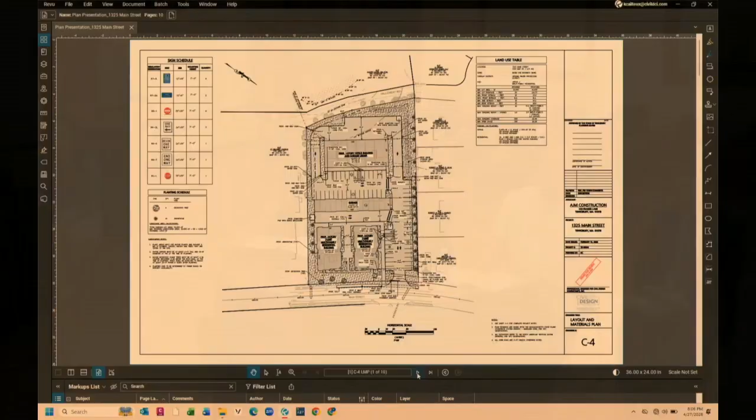With that, the floor is yours. Great, thank you. So we're here for a special permit and site plan review for the proposed redevelopment project located at 1325 Main Street. We initially opened the hearing on March 9th, where we presented the project, which includes 2 multifamily buildings, 7 units each for a total of 14 units, along with a commercial building located at the rear of the site. Since then, we've continued the past 2 meetings to address comments from the town staff as well as the peer reviewer TEC.

In that time, we also received a zoning interpretation from the building commissioner, confirming that this project qualifies as a mixed-use development and only needs to comply with the mixed-use business zoning regulations. So Section 8.2, which is the multifamily development requirements, does not apply to this project.

The applicant has chosen to retain certain elements that would have otherwise been required under Section 8.2, including the detached garage for the residential use and the additional parking. For context, Section 8.2 required 35 parking spaces, and we've provided 37. Under the MUB requirements, only 24 parking spaces are required for the residential use, but we've maintained those 37 spaces, so the plan exceeds that by 13 spaces.

Two weeks ago we submitted the revised plans and supporting materials addressing all the review letters. We then received TEC's second peer review letter this past Thursday. At this point there's a handful of remaining comments, all relatively minor, primarily related to additional drainage calculations and a few additional construction detail clarifications.

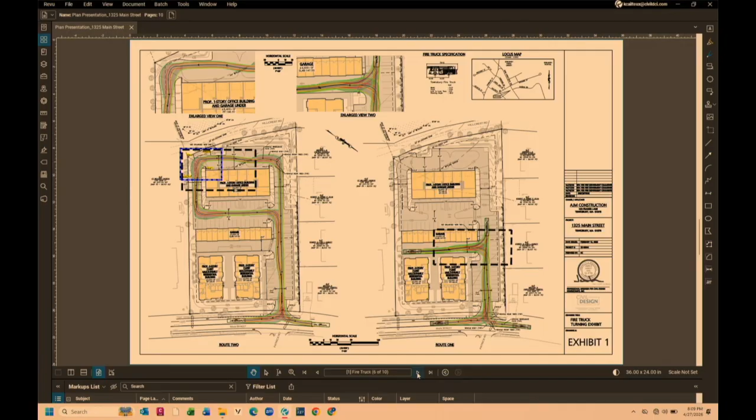Going back to TEC's second review letter, there were 4 comments, items 3, 7, 45, and 59, that were deferred to the board. I wanted to know whether the board reviewed those comments, and if you'd like us to speak to any of them. If you want to, it's up to you.

And then lastly, we included a waiver request letter as part of the revised submittal, which includes 3 waivers. I'm happy to also walk through those waivers if you'd like. Yeah, why don't you walk through the waivers just so everybody knows what they are. Sure.

Waiver number 1 is 6.1.10.b, the driveway separation from a street intersection. The applicant requests a waiver to allow the proposed site access driveway to be located within 50 feet of a street intersection, which is Patrick Road across the street. It's unclear whether we needed a waiver for this, but we asked for it anyways. The proposed driveway has been intentionally aligned as closely with Patrick Road in order to promote safe traffic operations.

This was provided from our traffic engineer. As designed, the exiting lanes for the site driveway and Patrick Road are aligned such that the left turn movements do not conflict. In fact, this is consistent with what DOT requires, and I provided an excerpt from the access management manual that provides additional information on aligning a driveway across from each other.

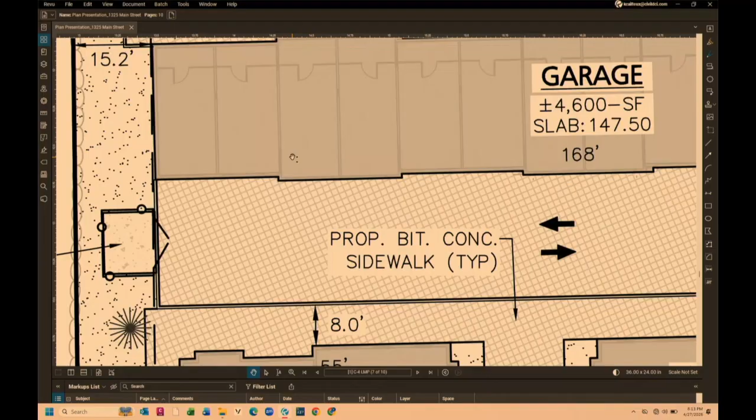Okay, so assuming that person can only pull in nose first, are they going to have sufficient room to back out and then turn to the right?

Yes. All right, and just to go through my recollection, are you still waiting to go before Conservation Commission? Correct, we're going to the next meeting, I believe it's in 2 weeks, May 13th. We opened the hearing already, and we continued to make sure we addressed planning board comments before we go back. Understood.

Okay, and as far as the 2 driveways, or this driveway being across from Patrick Road, I agree. I think the driveway that was there before was probably less safe. This would be more safe and more in line with what Mass DOT is looking for. So I see the logic that you have there. That's all I have, Mr. Chairman.

Thank you, Mr. Fuchsia. I don't have anything right now, Mr. Johnson.

So I'll go next, Mr. Chairman. Just a couple of comments I have. So the access to the garages in the rear, that's a one-way road going down? Correct, one-way circulation. Okay, so they have to go around and come back out? Yep, towards the right. Okay, go around, so come out.

One of my concerns was that first garage as you go down, I don't see him going left to get out, even though you may have a one-way sign there, okay, the garage on the last one on the right. So the first one as you make the corner to go back in the rear, his closest exit point would be the road right there to come out. Which, if you don't mind, I just want to understand the exact location, so the gentleman coming in, going down to the one-way, when he gets to the first garage, that's his, yeah, all right? Okay, when he leaves, he has to go by 6 more garages, take a left, and come back out, right?

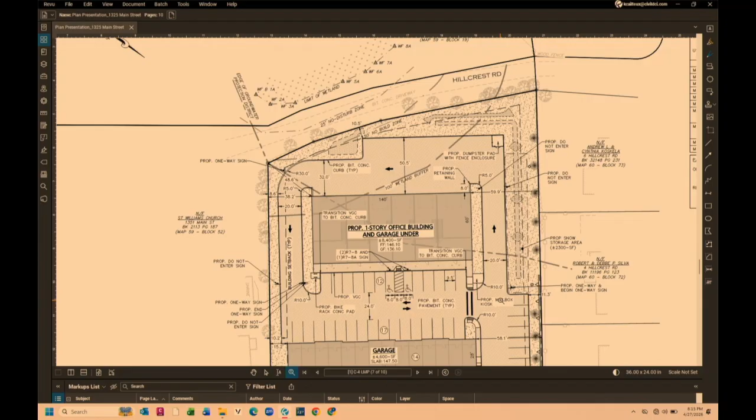I don't know if he'd do that because it's a long way around, but you have a one-way sign there, but if he abides by it, great. If not, the shortest exit for him is to take a right up the one-way and out towards Main Street. So I don't, I mean, is there no way of making that two ways? I mean, does it have to be one way? Not wide enough?

So there's a couple of things going on there. The first thing I think is, if you're coming out of that first garage, to try to take that, you need to go 180 degrees. I think that would be tight, and these are going to be not probably passenger cars, they'll probably be bigger vans. Right, so I think that turn is not easy, so I think that dissuades it.

And then the other thing is, we do have limitations to what we can do within the aquifer protection. So we have these two 20-foot wide lanes, which meet the fire department requirements. But if we went to 24, we'd be putting more pavement down in a groundwater protection area, which we try to avoid. Just a concern.

I seen the one-way, and I'm like, well, if I'm renting that garage, I may not be taking that left all the way around the buildings to get out, but just the easiest way to exit would be right, but hey, as an example, I have a garage at Boxcar Boulevard. Now, that is even a lot longer to go. That's a one-way all the way around that building. That building's probably 4 times as long as this one.

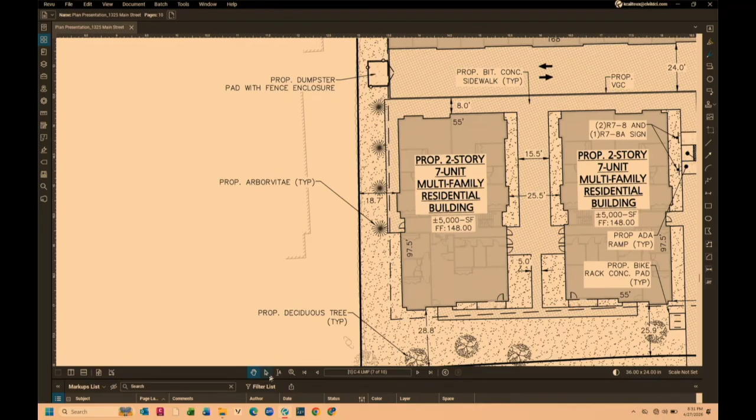That's a potential alternative, even though I'm not telling them to flip it, I'm just saying if this were flipped and the driveway moved, what you'd get instead would be a 7-unit, 2-story multifamily building almost on top of your house. I'm not saying which you should choose, I'm simply saying that's what you're looking at as the alternative, because they're not going to drive a driveway through the middle of the two buildings, I can't imagine why that would make sense.

No, the only other potential my husband and I talked about is switching our driveway, which would make it a little more difficult during inclement weather, to the side of the road onto Hillcrest. We haven't looked into it, haven't checked if it's permittable yet. But depending on how these conversations went, I don't know if you guys are willing to work with us on potentially moving my driveway so I'm not impacted.

As far as doing the actual work of moving your driveway, I would be willing to work with you guys on that.

Permitting would be something you guys would have to deal with, especially with Mass DOT, because you do have a curb cut there. Hillcrest isn't part of that - no, where your driveway is on Main Street. As far as suggesting closing the Main Street one and using the one on the side, I can't imagine why Mass DOT would care if you closed it.

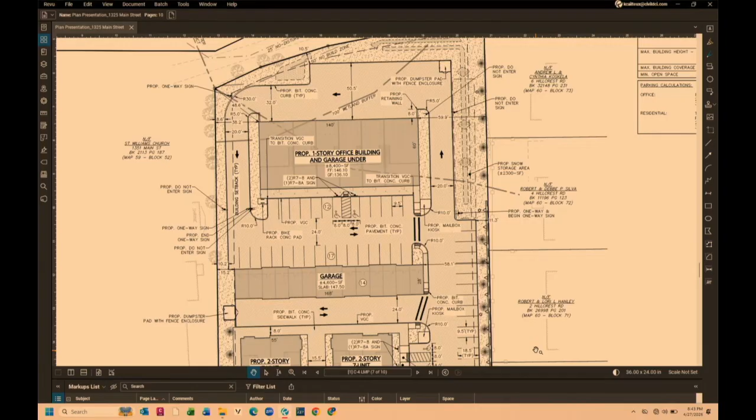Yeah, down the left side too, but this wouldn't be a plow doing a site like this - these are machines. So for getting in and out, it wouldn't be a plow pushing, it would be a machine pulling. Most sites like this at this point use skid steers or mini loaders - it's a cleaner job and easier to maneuver. I could just see it, we didn't have the worst winter, but if your dumpster area is under 4 or 5 feet of snow, your trash truck can't get in there to pick it up.

I'm all set, thank you Mr. Chairman. Anything else for us? No. All right, well I'm glad we resolved that, I think that's ultimately better for everybody and easier in the end. So then I will take a motion to continue this till 7:10 on 5/11. So moved. Motion made, do I have a second? Second. Motion made and seconded, all those in favor signify by saying aye. Aye. All opposed? Motion carries. Thank you, good luck, see you guys next time.

That's it, goes on top.

Feel like a motion to adjourn? I'm sorry, we didn't get that far - I hesitated, I have to do correspondence, which we had none. Other business not known at the time of the posting of this agenda, anyone? All set, Mr. Chairman? Nope.